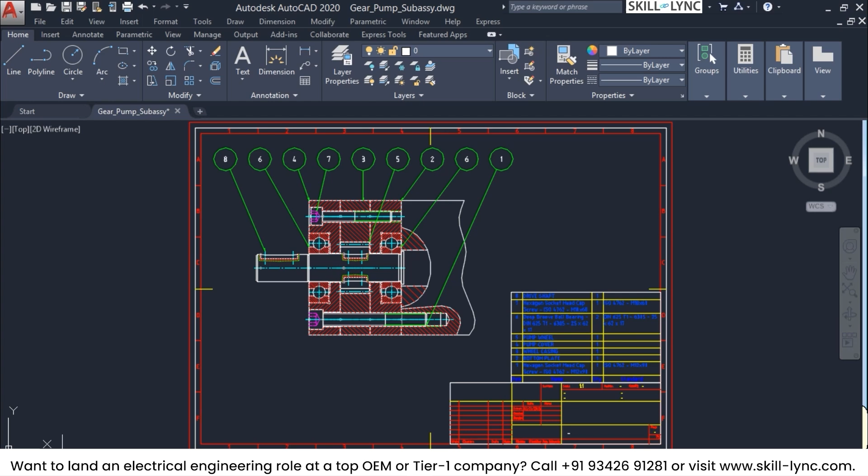Now you can see this layout tab zooms out to the entire window and plots to it. If you move to the layout tab here, you can control how, as you could see initially, both these paper layout tabs are one and the same, because it is just replicating whatever you have in the object.

So the first understanding is how to differentiate between a paper space and a model space: in this layout, in the paper space, you can see we have an icon - this is in a layout tab. Whereas in model, we have an XY icon here. So this is the first and foremost difference we have here.

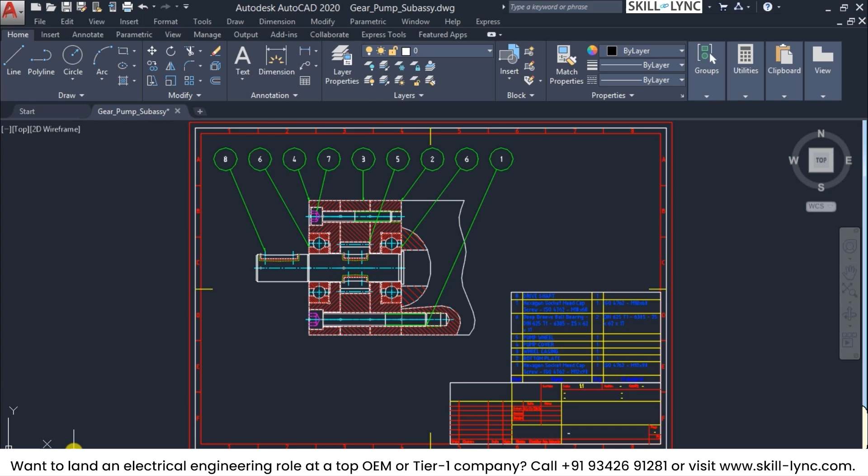Next, this is the custom layout we have. First, let us see how to create a new layout. For that, we have this in the tools menu, under wizards we have create layout. In this create layout, it's where we can go through a wizard based layout creation that will guide through the steps.

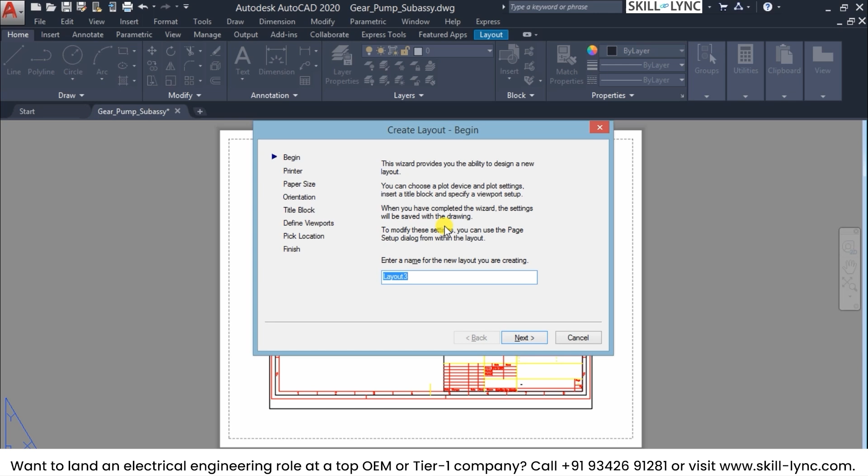First is the title of this layout, so let us retain the same title. Next is where you attach a printing setup to the layout you are creating. Suppose you have a different type of plotter already available, then you can attach a unique plotter to a unique layout. This is the first and major advantage of having different paper space layouts.

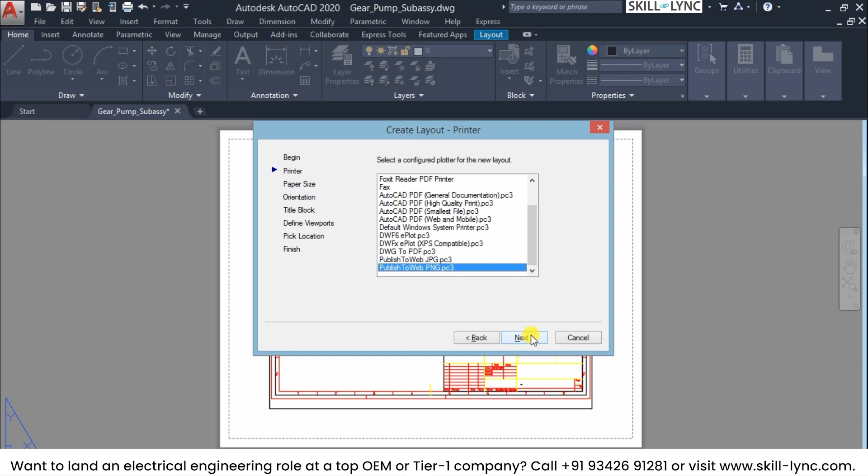So let us go ahead with plotting this as a PNG, that is as a PNG, an image file. Then you can select that and click on next. Based on the selection of the plotter, the size is also determined. Based on the resolution or configuration we select, the dimensions are automatically plotted. As it's an image, the dimensions are going to be in pixels.

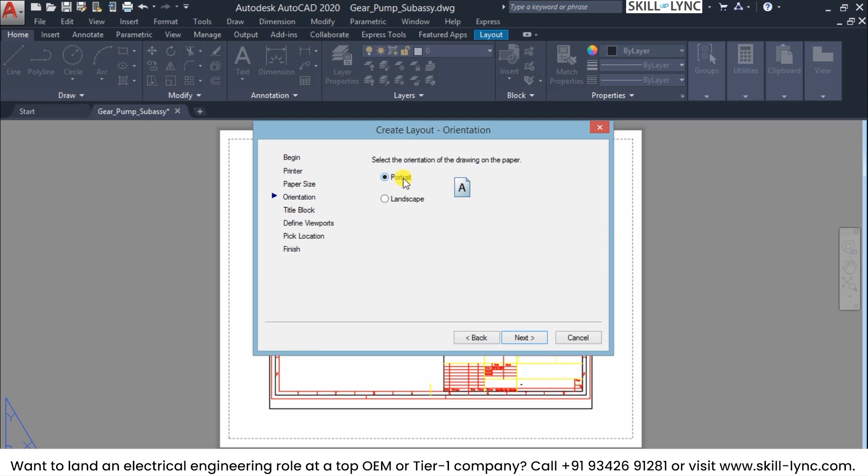This is the dimension of your plotter, so we'll go with the default one. Now we can control the orientation of the drawing on the paper. Right now it is in this format, but if you click on landscape, this is how it will get printed. The view can be the same, but in printing it will get modified. So let us go with this.

Next is the important part: the usage of a title block. If you have a custom made title block, you can call those blocks as part of this drawing and include that in the drawing. Right now we already have a title block defined in the model space itself, but in the next couple of moments you'll see where this title block is actually useful when calling it in the paper space. So let us just proceed without any title block.

Next, in viewports, this is where we can custom import any viewports that we want. But right now let us proceed with the basic viewport, that is a single view alone, and we are not going to create any viewport now. Later into the drawing, let's see how we can add different viewports.

So we'll click on this none viewport setup and then click on next. You can see that we have skipped one step here, the pick location, because we have not selected any viewports, so it is directly prompting to finish the layout configuration. Once that is done, the new layout is generated, but there is no configuration attached to it, meaning the model space is not yet linked because we have not created any views. You can see that as you are in the layout area, this layout tab has also got introduced here.

So now let us go and introduce the different views that we want. One way is using the preset views already there, or let us go and introduce the viewport directly, invoked by the viewports command. Now you get a dialog box calling for the different views that you have. This is a single viewport that you can see in preview, and you can also see what the current view is. So what are the different views that can be mapped to it? Either the current view, which refers to the model space view that we have.

Again, what is the setup that we have? Right now we are operating on the 2D layout, so we'll go ahead with this 2D. Suppose we have three layouts and we want them displayed in this manner. Once you click here, for three you have left, right, above or below combination, or vertical, horizontal combination. That is how you can create different views.

Now let us just go ahead with this three left views and see how it impacts. Click on OK, and now it is asking for the corners that need to be specified, the overall view area we want to align. Assuming this is where my three views have to be positioned, once you click there, you can see that the drawing gets aligned very beautifully into the different views. But right now it's all one and the same.

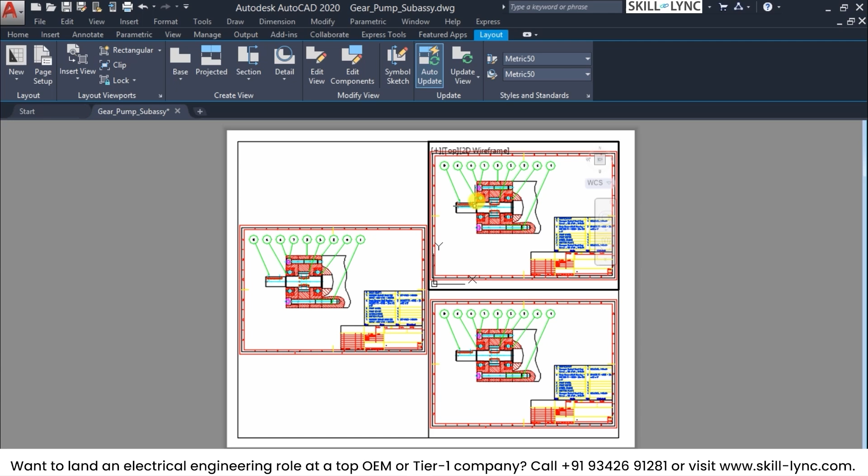How different it can be is that, supposing this is the main diagram and you want to zoom into a particular part, what you have to do is select the view by double clicking on it. By double clicking, you enter a kind of model editing space. You are still in the paper space only, but now you can edit the component, and in this editing view you can use the zoom functionality.

I am now using the cursor and also this interactive ribbon, so you can see that I am zooming onto the bearing part here. Clicking escape to come out of that function, now I'm just moving on to here, clicking the left button, and now I'm zooming to this part.

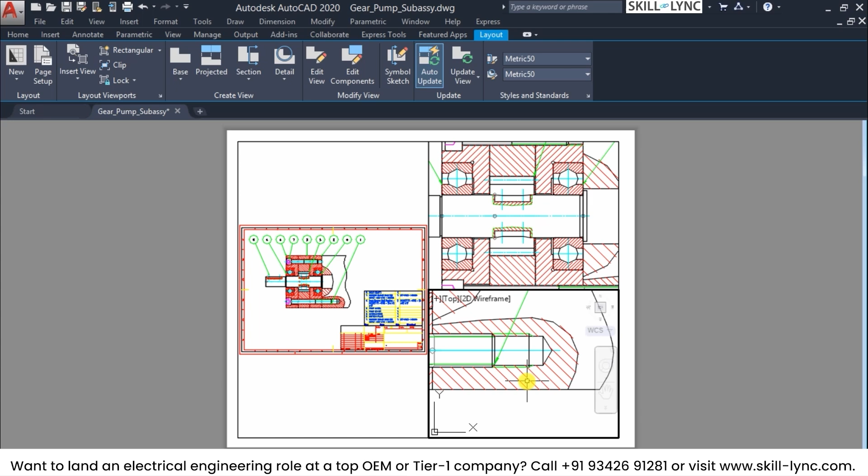Let me zoom into the bill of material part. So this is how you can customize the viewports that you have aligned. This is one way of doing it.

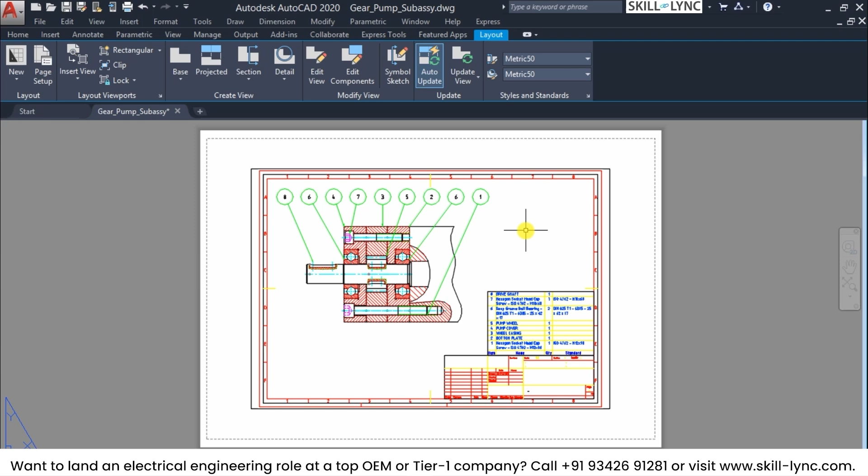The other way is to create a dummy layout. Now when we create a new layout, the previous properties of the model space get applied. So alternatively, in this major view, since it already has a title block, you can see that at the end of the zoom view we do not have a title block.

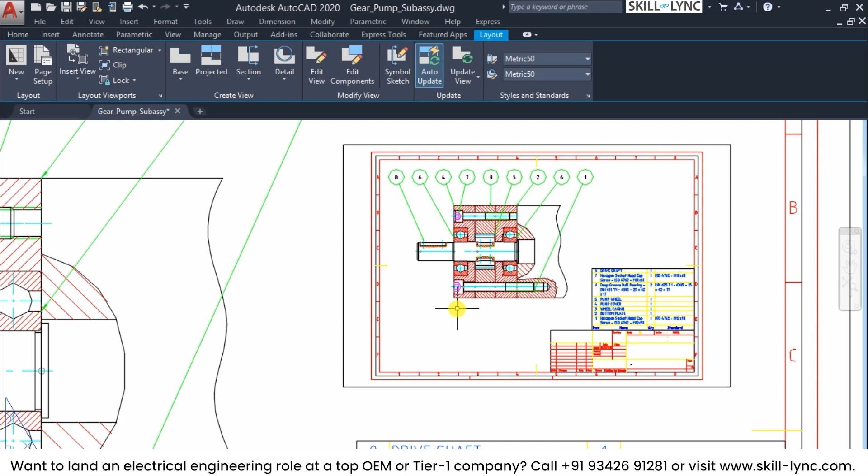This makes the referencing all the more difficult. So what we can do is create a rectangular entry here, creating a custom viewport, and on double clicking on it again you can enter into the creation mode. This will serve as a detailing to you.

Now you can see that the required view is zoomed to it, but you have to take care of where you are zooming.

You just have to use this lock/unlock property so that you can modify the views that you want. By selecting the icon here, you can select what the zoom ratio is also from here.

So this is one way of using a detailing view that you want to paste into here. And once in the editing mode, you can also use the other commands for highlighting the section that you have here as a detail view.

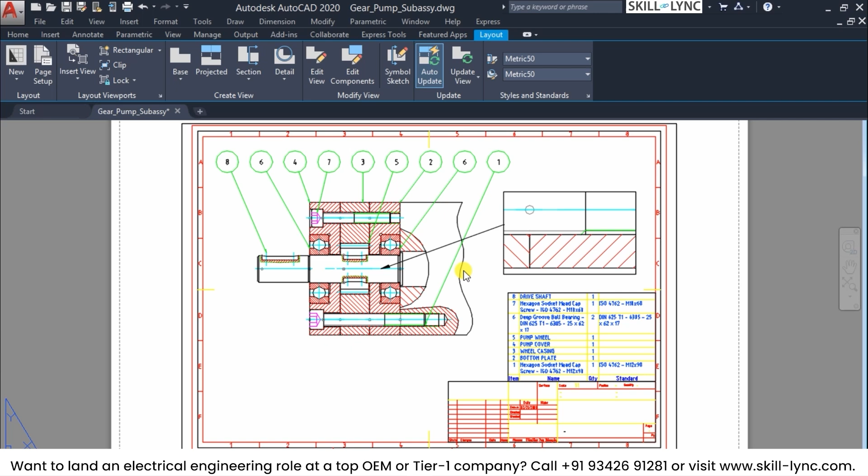So this is one application of using viewports to create custom detailing for specific printout layouts only. This sums up the viewports and model space and paper space layouts that you use to make custom plotting easier.

In this session, we saw a lot about what printing is all about, how to use window-based printing, how to use limit-based printing, and what different plotter configurations we can do, what dimensions we can control, and how to call those things. We focused a bit on the plotting and printing part.

Then we spent quite a bit of time viewing what macros are all about, how to record the steps and then project it out, how to create your own custom macros and paste them in tool palettes - those kind of exciting things we've seen. We also looked a little bit into the VB editor for these macros. Hope you've got a gist out of it.

I would implore you to explore a lot on macros, because in due course of time, even though it might seem a little complex in the beginning, towards the end you'll find yourself very comfortable working around with macros. In the next session we'll also look into an added part of it to create our own custom codes.

For macros we are looking only at system variables, how we can tweak them, but in the next part we'll see how to use our own functions, create our own commands within the AutoCAD environment. So macros is a bit of an overview of the programming side of AutoCAD that you can use to automate redundant things you've been doing.